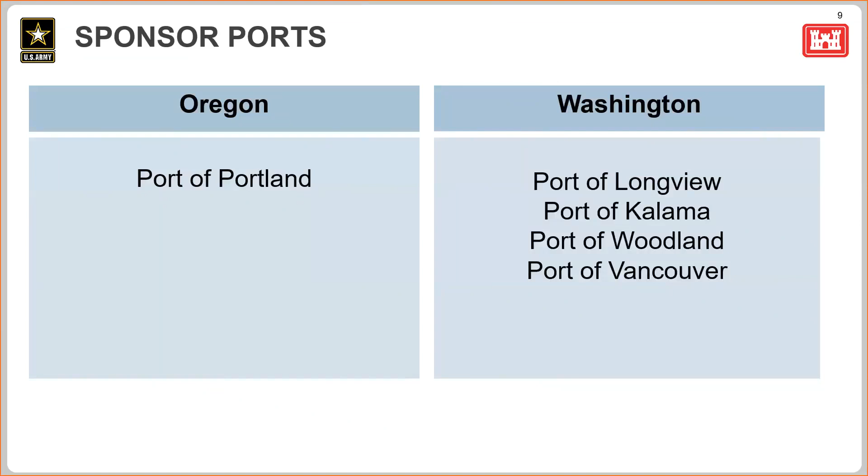The next step is to release the draft report to the public for review. The draft report is scheduled to be released for public review in November of this year, and this will include further refinement of the recommended plan, revision to the ESA BiOp requirements, and releasing the final report. The final stage for this report is Corps approval. The final report goes to the Army Corps of Engineers Northwestern Division for approval, and then we will receive the NEPA record of decision, as well as ensure other environmental compliance actions are completed, and SEPA adoption.

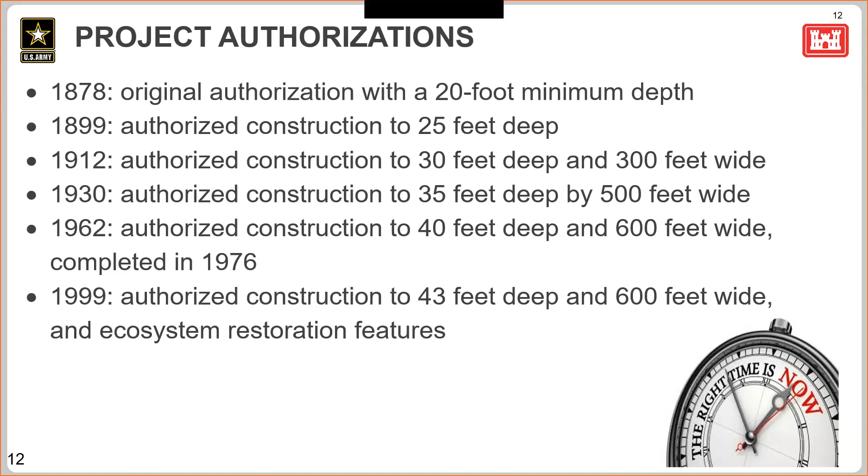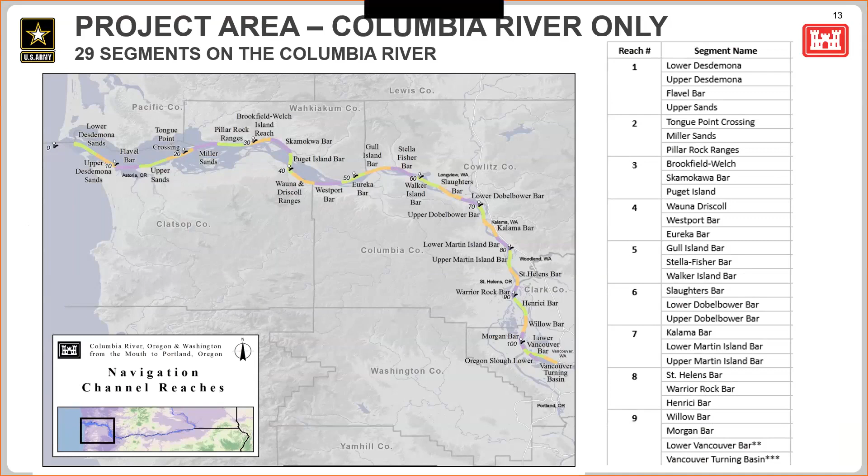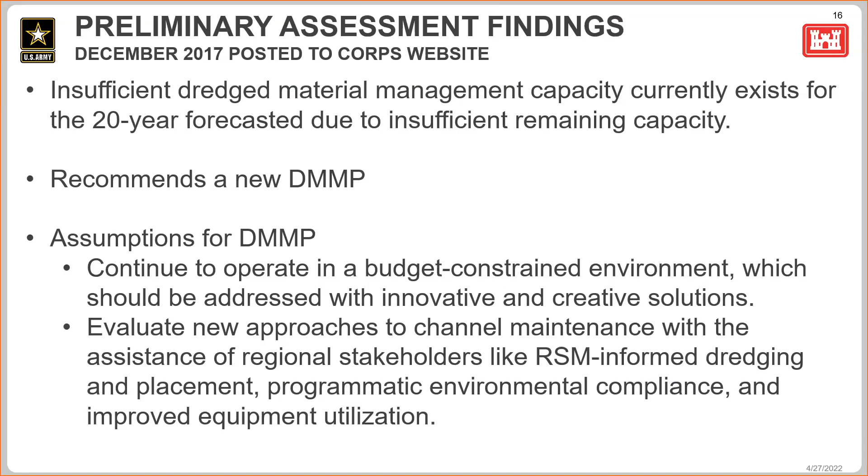Why is it important to maintain the navigation channel? The preliminary assessment economic analysis identified that we do have a federal interest, and here are some reasons why. So first off, every year we see over 50 million tons of cargo worth $24 billion moving through the Columbia Snake River navigation system. And the cost to maintain the authorized channel dimensions is only $43 million compared to that $24 billion that we are seeing move through it.

And the Lower Columbia River is nationally significant in that we are #1 in the United States for wheat export. We are #2 in soy and corn export, #3 largest grain export in the world, and we're #1 on the West Coast for forest and mineral bulk export. Over $1 billion was invested by the port since the deepening of the channel in 2010 and increases in the metric tons of cargo, both imported and exported for ports of call. So this is a very vital gateway for the global trade to continue as a national priority into this future.

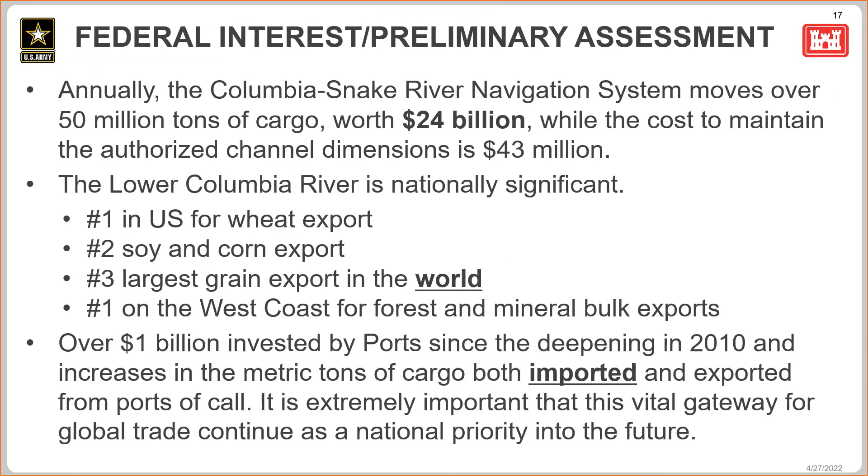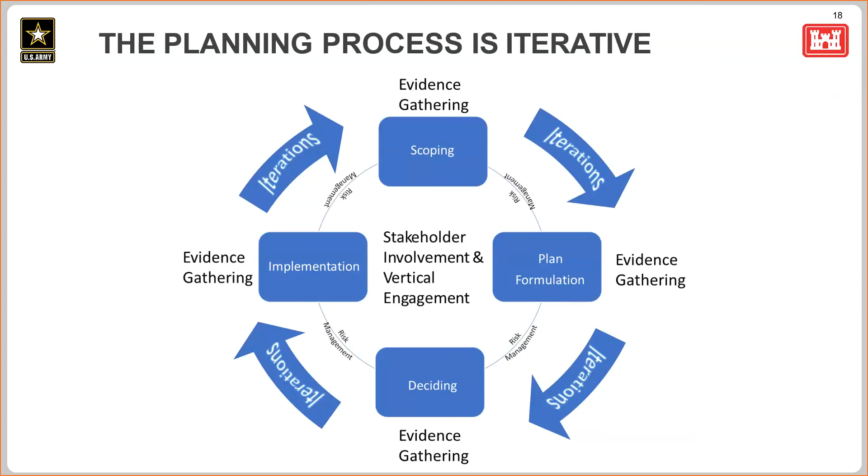Current placement sites are at or nearing capacity. Sedimentation and shoaling rates vary each year, making it difficult to accurately estimate annual dredging needs to support budget requests. Pile dikes, islands, and other channel training structures are not functioning efficiently or even effectively in various locations throughout the project. And real estate is in scarce supply to find land for additional placement sites.

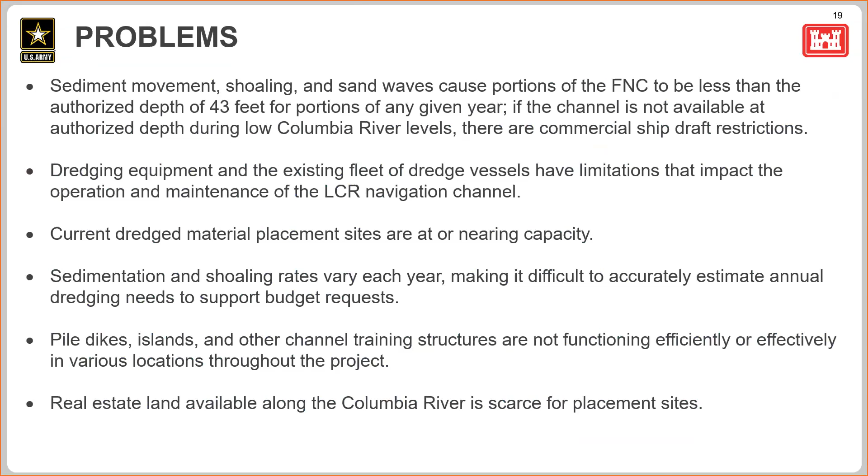The planning process also identifies opportunities and constraints. So some opportunities are identifying potential in-water confined disposal sites and new upland disposal sites. We'll also identify optimum dredging equipment per shoal to guide the implementation of the 20-year plan. We'll identify optimum placement options per shoal to inform the capital cost, and identify suitable economic and environmental beneficial uses for the dredge material, including habitat creation opportunities with the use of dredge placement.

Some constraints that were identified is that the dredge fleet remains the same. We'll be constrained to use the existing Corps dredging vessels, the hopper dredges, as well as the dredge Oregon. The equipment safety limitations are related to water depth, river flow, and sea conditions that cannot be violated. Therefore, it's limiting in what dredging equipment can safely perform work at various dredging, transfer, and placement sites. And I'll cover what transfer and placement sites look like a little bit later in the presentation.

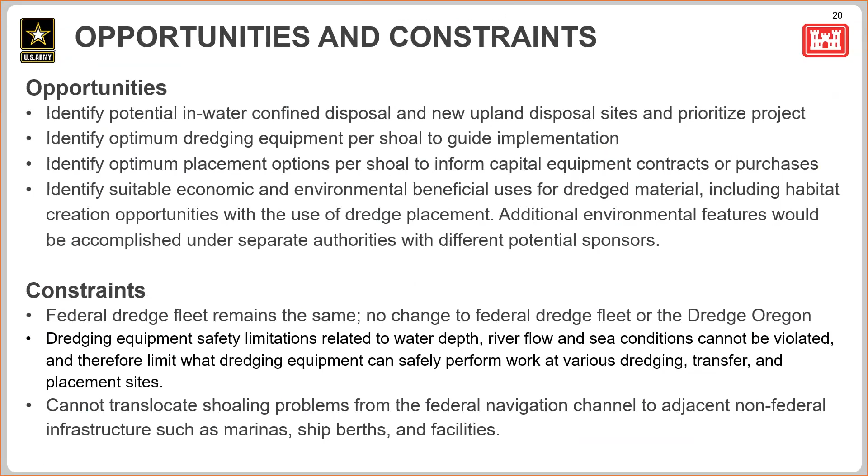We also cannot translocate shoaling problems from the federal navigation channel to adjacent non-federal infrastructure, such as marinas, ship berths, and facilities. We have four main objectives of the project. Number one is to identify an adequate suite of placement locations, investigate beneficial use opportunities, which, as I mentioned, could be either economic or environmental, identify options for reducing reliance on dredging as a channel maintenance method, and identify dredge equipment resources that improve maintenance and efficiencies.

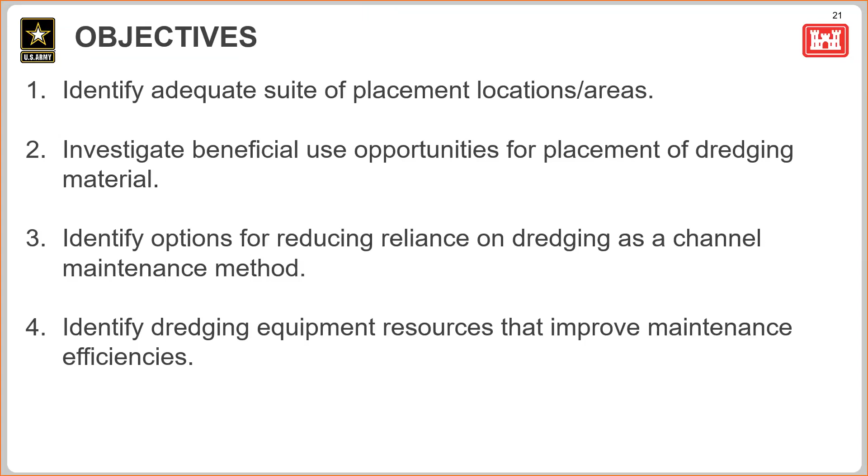We do have a question that came in. It's related to the interaction between this project and others in the river. So I'll read it now. Are there any projected dredging impacts on the Lower Columbia River if any dams are removed? The question is, if dams were removed, would we have dredging implications? Yes. I would say yes, but that would definitely be outside of the scope of this specific project. And I would assume that would be a full study that would happen if the dam were to be removed on the Columbia River.

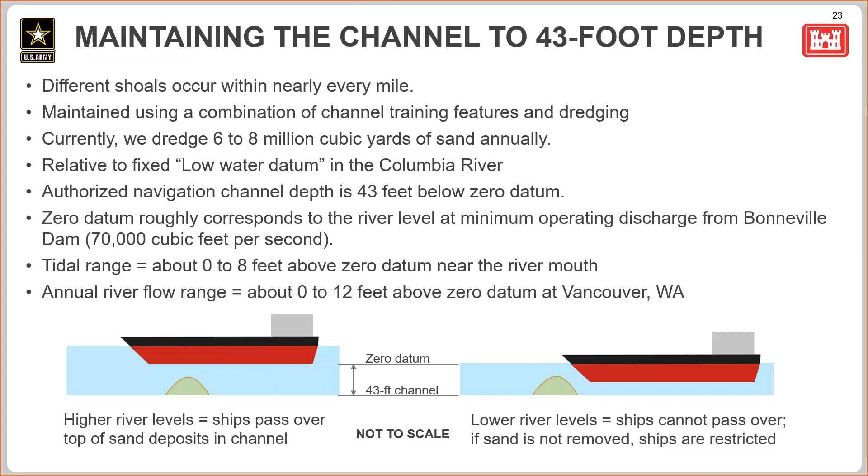Some locations along the river develop shoals multiple times a year, others maybe once a year or every few years. And it's important to note that the material in the lower Columbia River navigation channel has been tested and is all clean, mostly coarse grained sand.

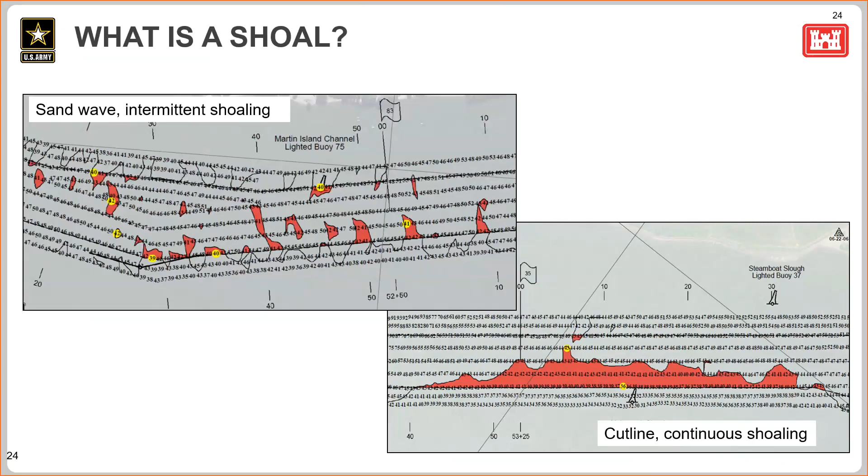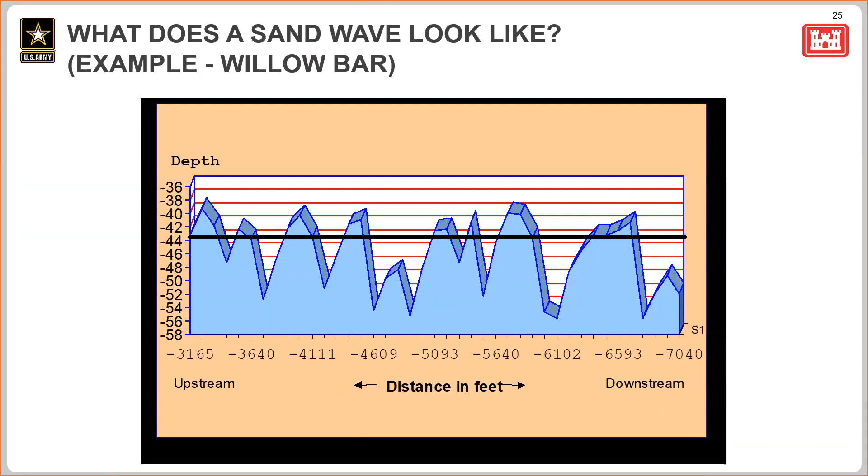Hopper dredges are not interchangeable, so the smallest dredge, Yaquina, is best suited for small sand waves with close in-water placement areas, while larger dredges like the Essayons and most contractor hopper dredges we see are better suited for larger volume shoals and need deeper areas to safely place material. It takes the pipeline dredge Oregon and all 3 hopper dredges working together to maintain the channel every year.

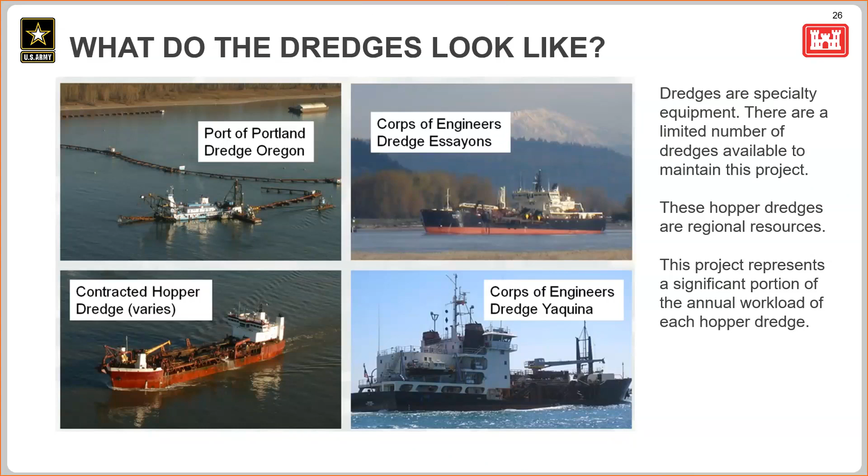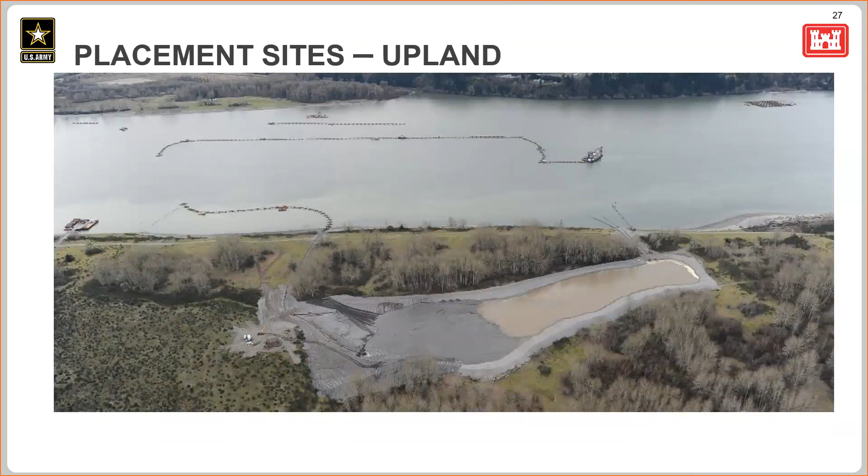In-water shallow placement sites are placement sites that occur in less than 20 feet deep. Material is placed by pipeline or by hopper pump out, and it's pumped to the site directly from a shoal or from a transfer site. These sites have a potential for creating or improving shallow water habitat.

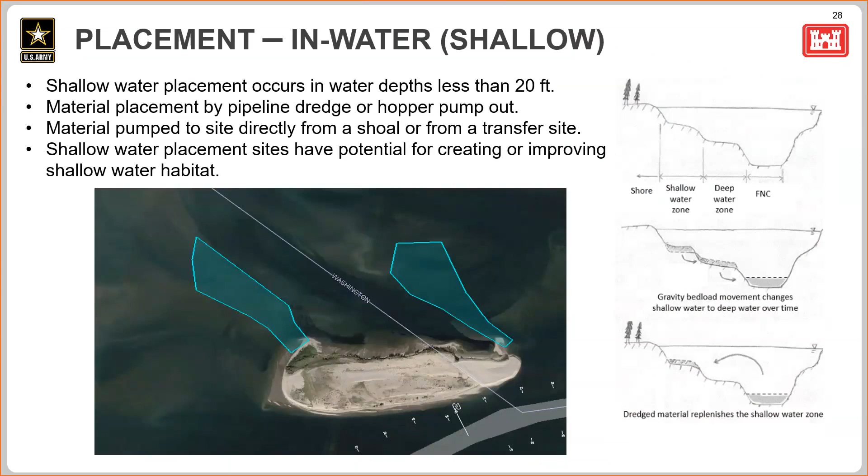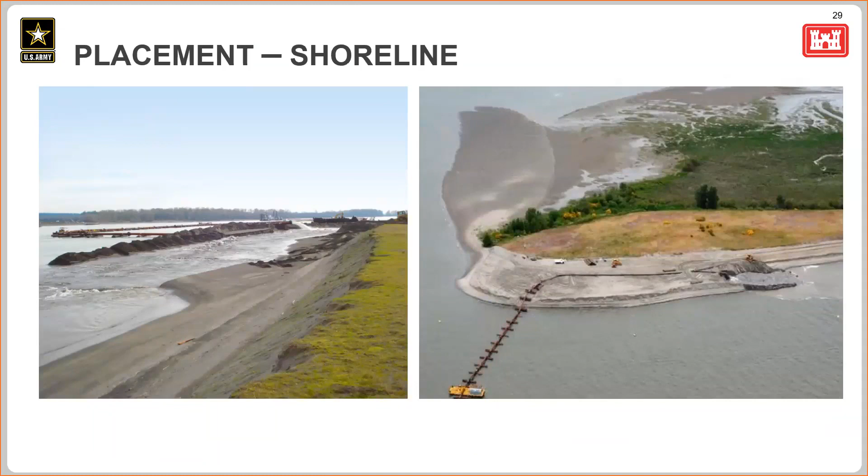And transfer sites. Why do we need transfer or rehandle sites? They are needed where the distance from the upland or shoreline or shallow water site to the nearest shoal or dredge location exceeds the physical pipeline length of the dredge to pump it out. So basically, we have a dredge location and a placement site that are too far for the dredge to actually reach. So dredge material is temporarily placed in water in the rehandle or transfer site to clear the shoaling quickly, and then later, that material will be pumped out into the final placement site.

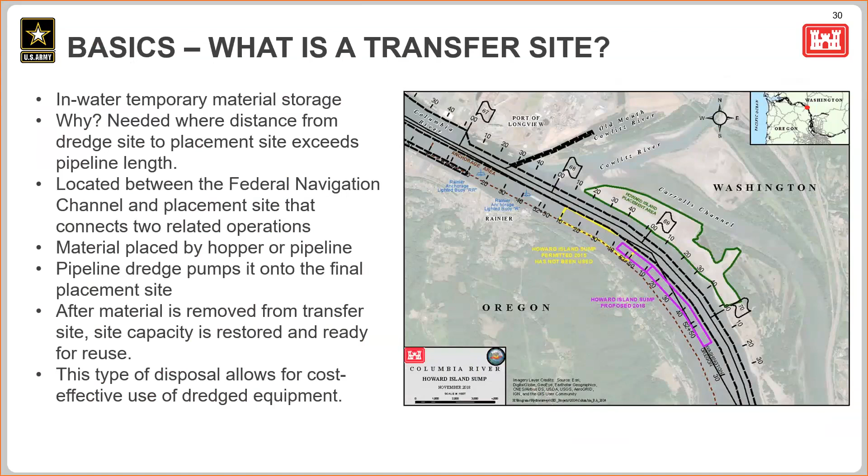So how do you reduce the amount of shoaling in the channel? We use channel training structures. Pile dikes and dredge material fill have been added to create a narrower river cross-section that helps prevent sand from depositing in the navigation channel. Timber pile dikes increase velocities in the channel to prevent sand from depositing there and decrease velocities at the shore to reduce erosion. So they help hold the channel in and they keep it maintained.

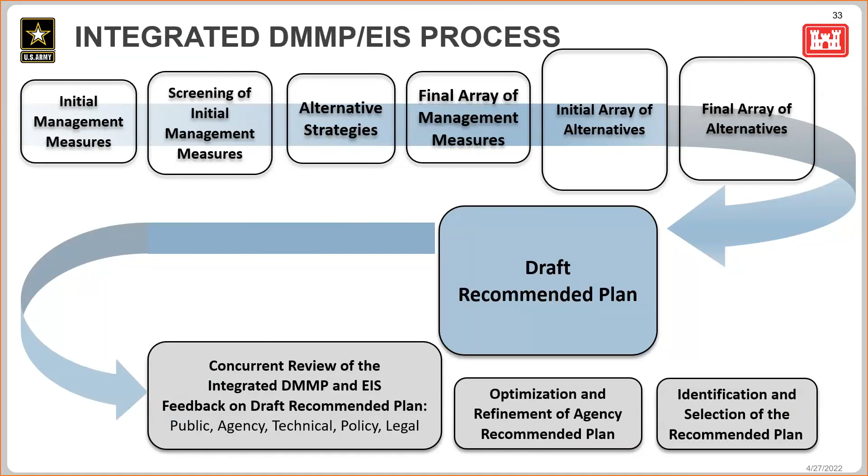The initial management measures included were both structural and non-structural. And these were developed during the scoping process, charrettes, workshops, and the value engineering study. Screening of the measures was based on planning objectives and constraints, which I spoke about earlier in the slides, technical feasibility, and whether the measure has been carried out already. And these are a handful of questions we asked ourselves when walking through this screening of initial measures.

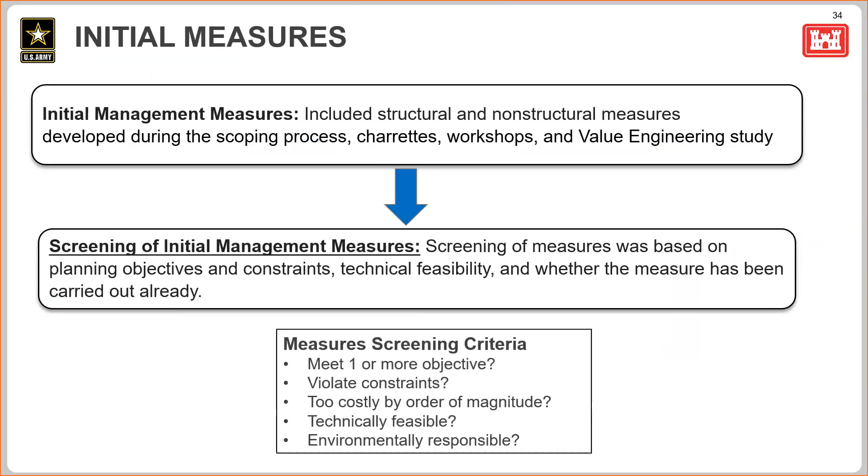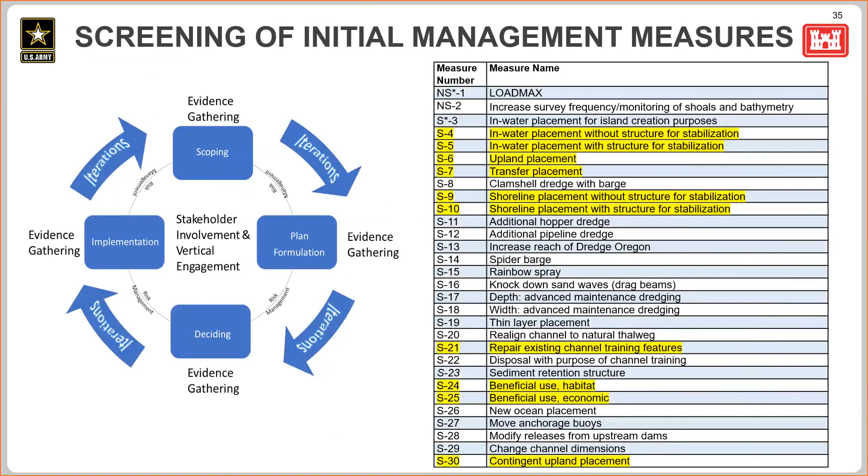Alternative 1, we identified as a maximizing placement alternative. And alternative 2, we identified as a minimized dredging alternative. And this one really relies heavily on constructing new channel training structures like pile dikes.

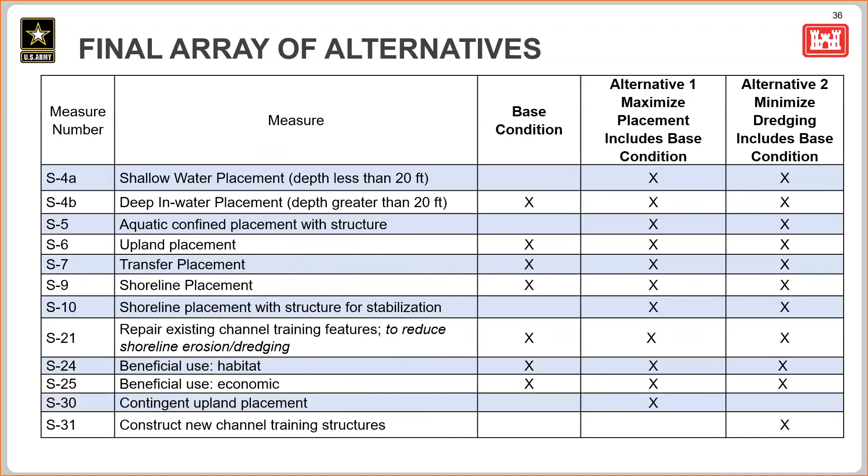So how do we evaluate these alternatives? We use this model that is called Dredge Material Management Decisions, or D2M2. This model compares countless solutions and evaluates which versions even slightly outperform others. This provides an output of the least cost combination of placement sites.

And there are several inputs that are necessary to run this model. Those include shoaling locations and volumes, placement site options and how much material they can hold, transfer site locations and their capacities, site details like cost, availability timelines, site constraints, etc. Routes are then identified between the potential dredging and placement site pairs to include transfer sites if applicable. And then the model identifies the least cost option of all of these factors.

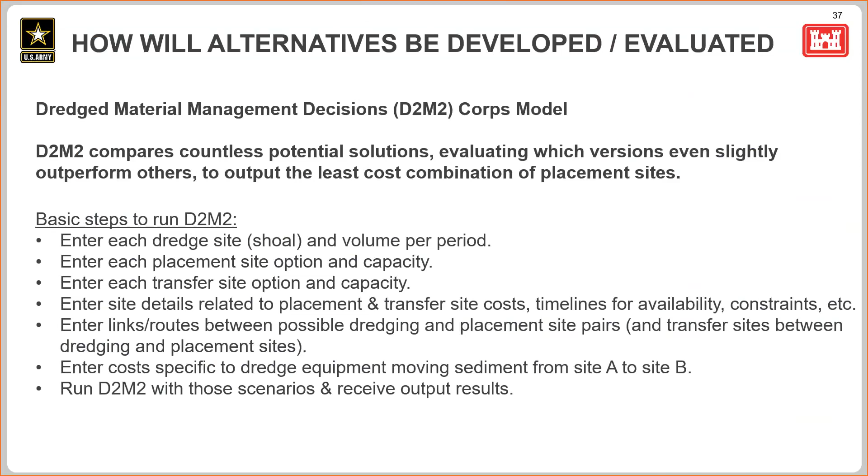And as I mentioned before, the model identifies the least cost option of placement and anticipated dredge material over the next 20 years. And this is the alternative that the team will proceed with to take forward to environmental and cultural resources review.